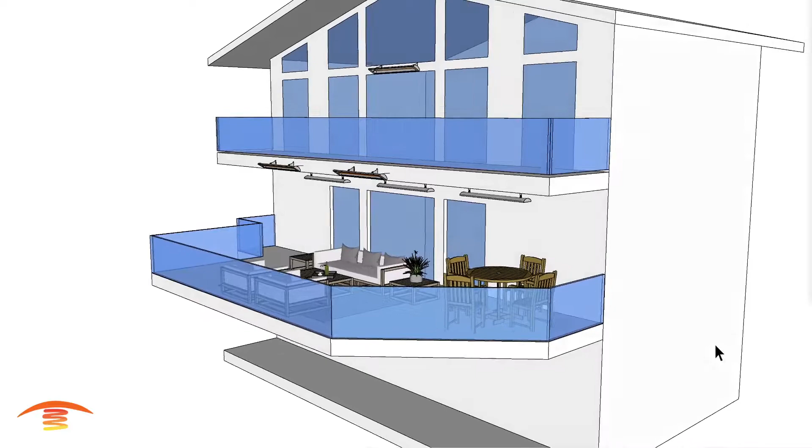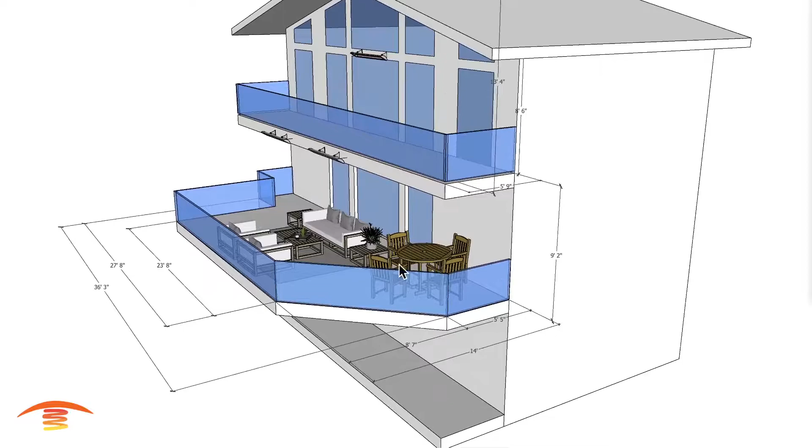Now let's get heating. Alright, so here we have this residential application. I'm just going to go right into the overall dimensions. So basically I've got 14 feet by 36.3 from this edge to this outer edge over here. We do have a section here about 23.8, and then dining space here. There might be just a two-top table here, or two seating table, but that's about 5'5". And then I have this section over here that is 5'9" that comes out.

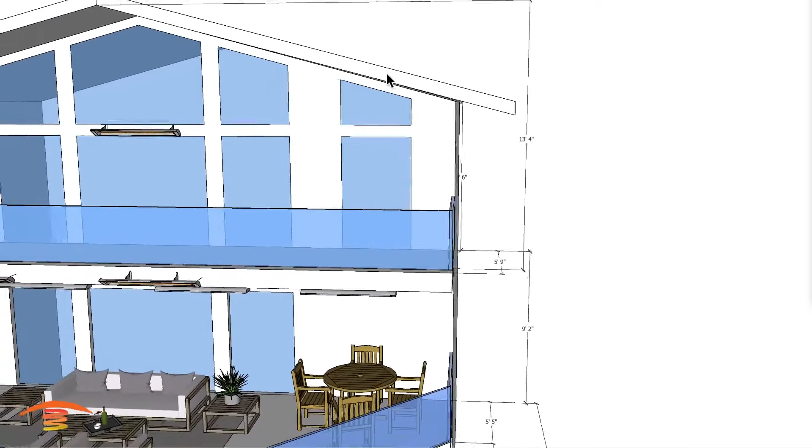And I have the overhang just 12 inches shorter than that. And you can see here I have that overhang starting roughly around that 8'6", right around here. And then all the way up to 13.4 from the tip here to the deck finished floor here. Let's see if there's anything else that we should talk about.

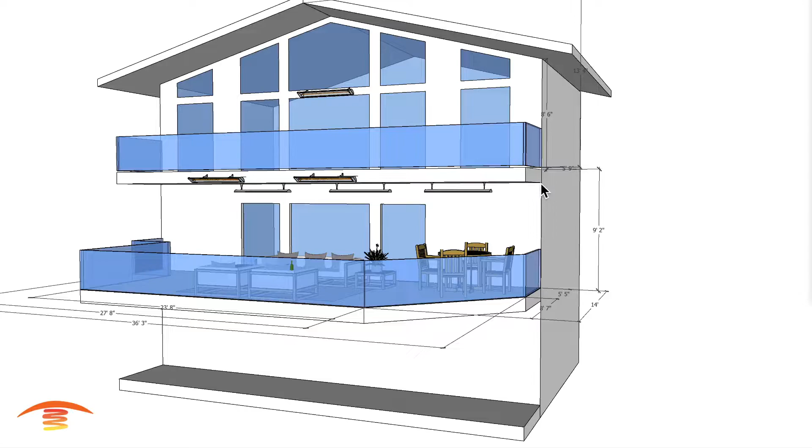You can see that there's a section that's at a 45-degree angle here, and I think that's about it. Alright, so let's go ahead and turn that 9'2" on the bottom section here to the top of the deck again. And I have this at 12 inches here, so that would actually be 8'2" to the bottom. Alright, let's go ahead and turn off that dimension.

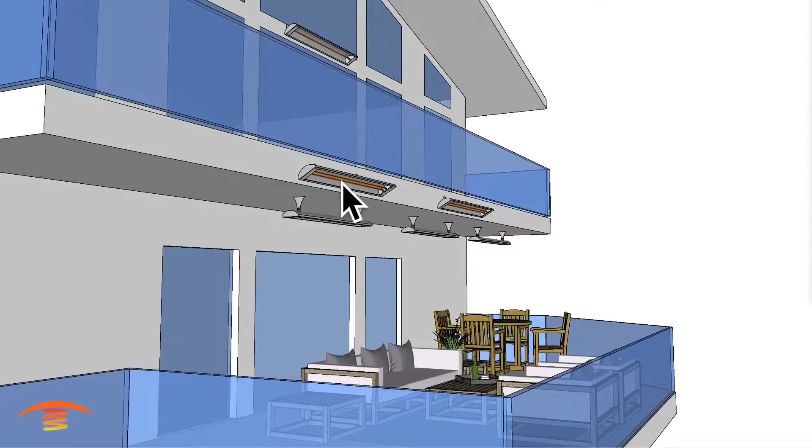Now you can see that I have a few units, and they might look like they're out of place maybe, but we can also adjust that. Essentially what I have is the CD 6024, 6000 watt 240 volt units here, and I do have them mounted centered on this 12-inch decking up here.

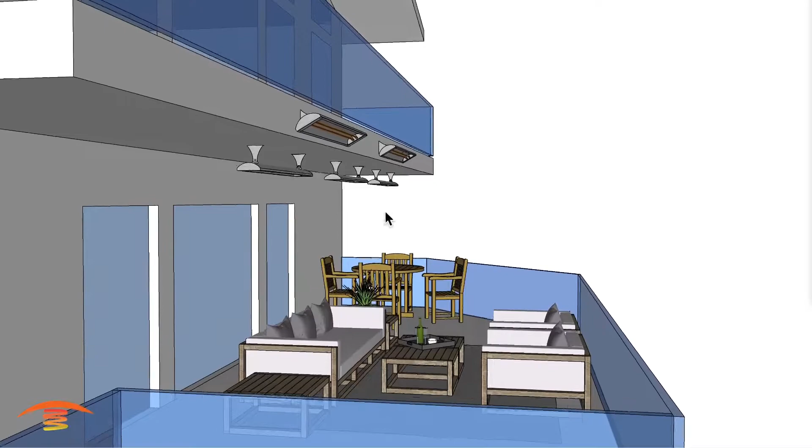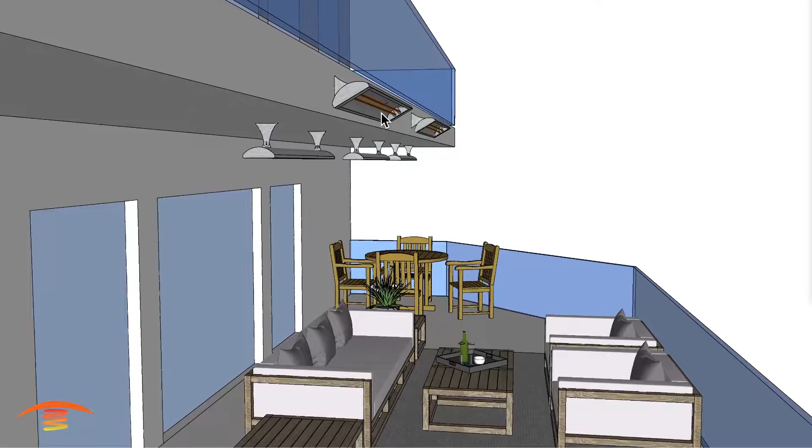And the reason I have 6000 watt units is because I need to cast that ray out as far as possible. If I place the 4000 watt units, which I have over here, in the same location, I'm really not going to cover this area here well at all. So it'd be really ineffective to place a 4000 watt heater here and then try to cover out in this space here. That's why I have the 6000 watt CD models here.

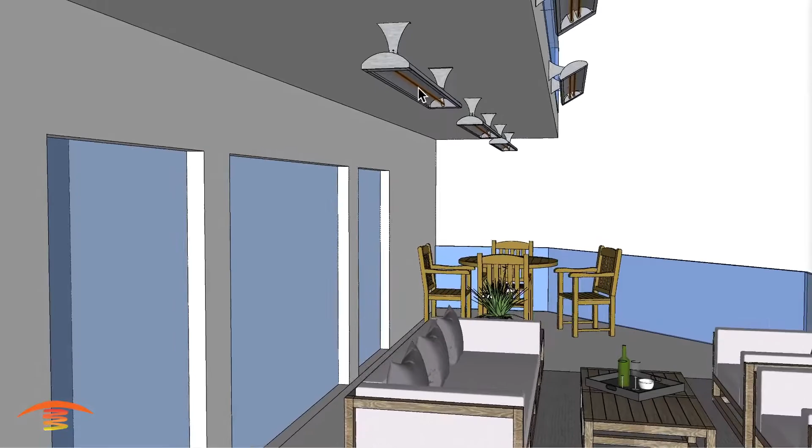These are dual element units. You can put a controller on it or a duplex switch on it. In any case, if you put a duplex switch on, 3000 watt units aren't going to be very hot, so I'd still probably just go with a control system if I could.

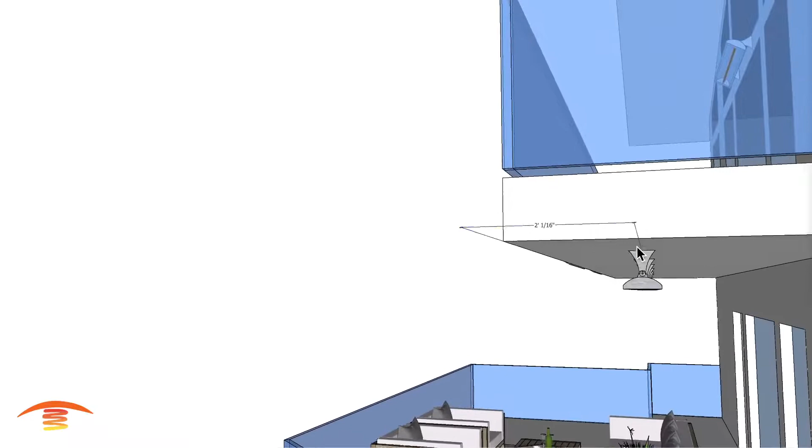Now the 4000 watt units I have placed here, and I think I have them just at about - let me go ahead and measure this off here. So from this edge here to this edge here, we have, let's see if I can get it out here, 2 feet, and this is centered 2 feet to the outside edge over here. And let me turn that off.

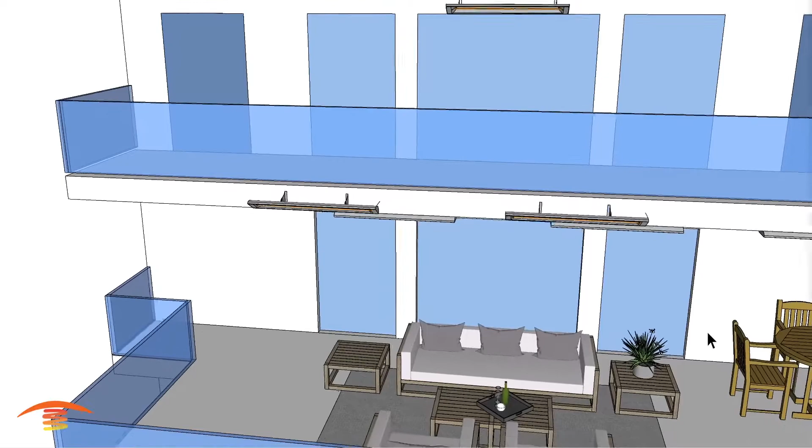And then I have them at 6 inches of clearance. Now, one thing I need to be concerned about is these are doors here. I think this is a window in the center. It looks like they're sliding left and right, or they might actually swing open.

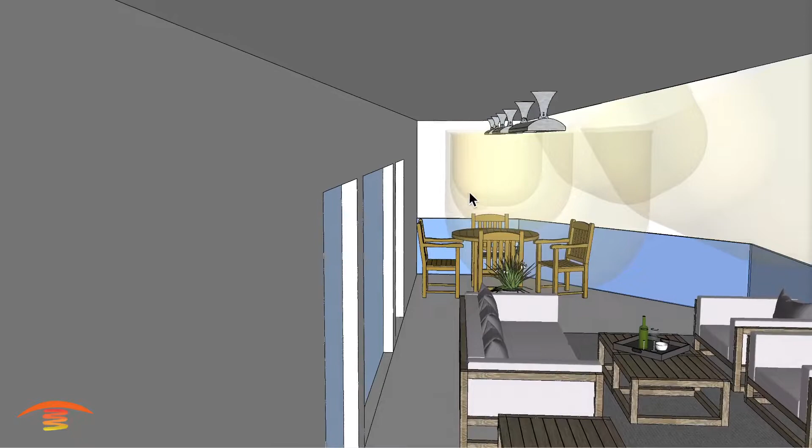If they swing open, they can only swing indoors. They can't swing outdoors with the placement of these heaters here, because I need to have that clearance below the heater, and I need that 18 inches from here to here. So if that door swings out, then I will be in that clearance issue.

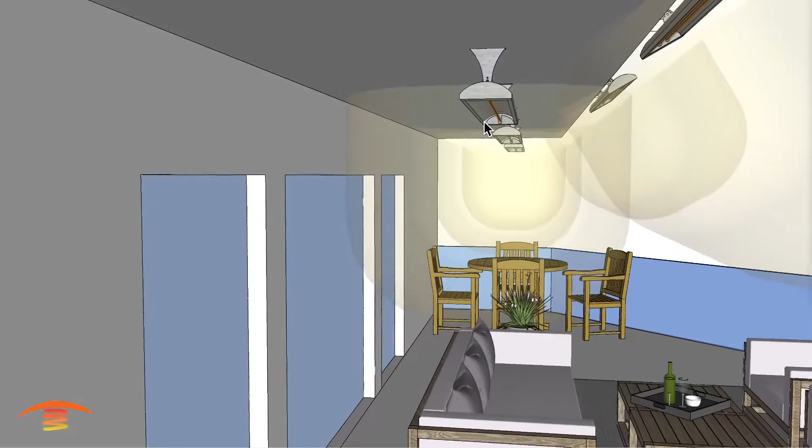If it's a combustible door, then that would present a larger issue. If it's non-combustible but it's still glass, then I don't want to overheat the glass unevenly, so that's the second issue that I would be looking at.

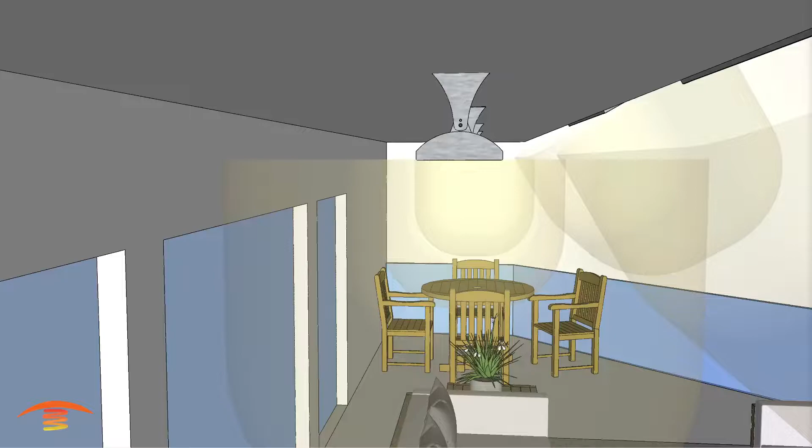Also, I want to state that these are 4000 watt units. They are the C model, so this is a C4024. You can replace this with a, say, a Slimline. So a Slimline is going to just look much more different. Let's see if I can just give you an example here without taking up too much time.

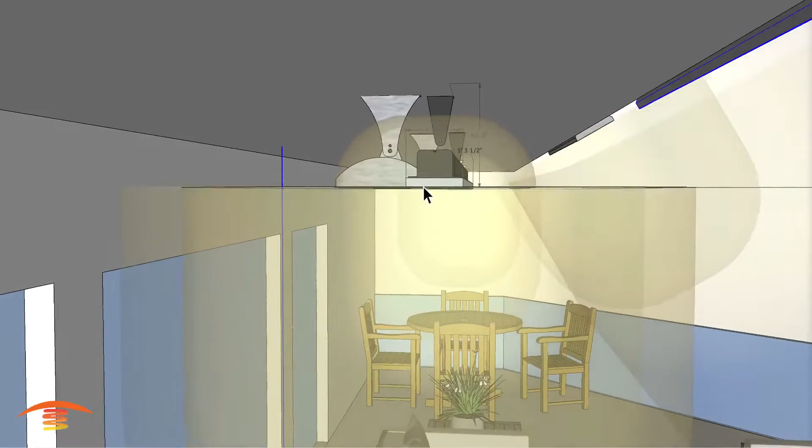Let's just place the unit here, and we're going to go ahead and change this angle here just slightly real quickly, hold on one second. We'll go like that. So you can see this, the profile is really what I want you to see. The profile is much more different.

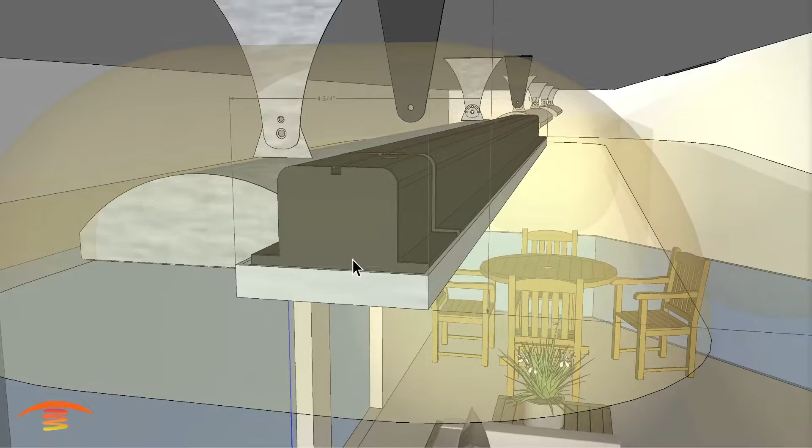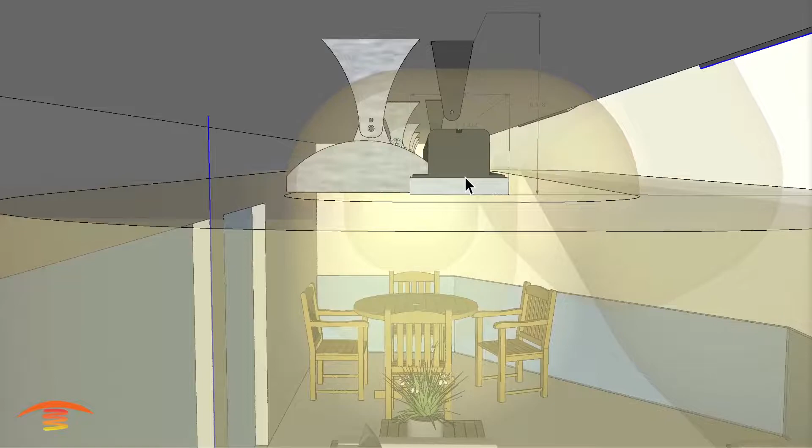Now the issue that I have with this is this property appears to be in a beach area, and if it's like maybe on an island or something of that nature, then this is made out of extruded aluminum. This body itself, the bottom here is stainless steel or powder coat finished black, but the body is, like I said, extruded aluminum, and aluminum has a corrosive issue with regards to being close to the ocean. So that is why I'm picking the C model as opposed to the Slimline.

Let me just move this over just a little bit more here, so you can get a better profile of the two.

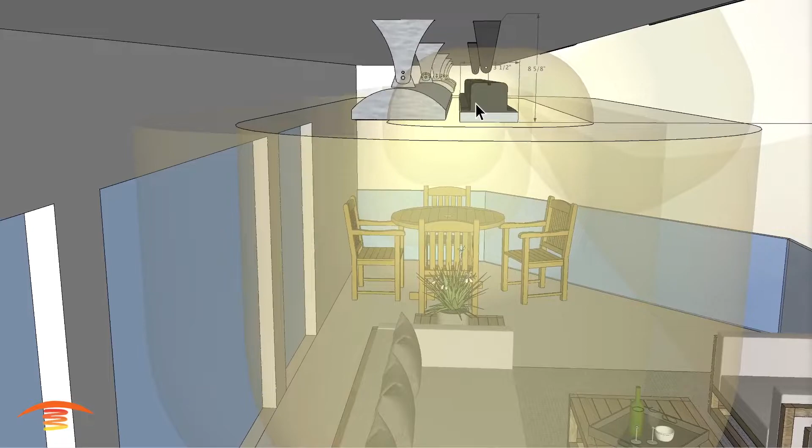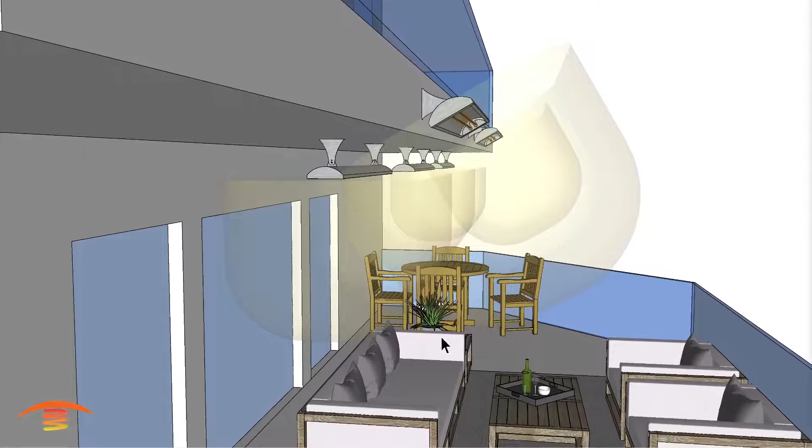So again, there's the profiles. I like the look of this better. I think it would look better, but if you put this in a corrosive environment, you will end up probably replacing it every 5 to 7 years, something of that nature. So just bear that in mind. I'm going to go ahead and delete that for right now.

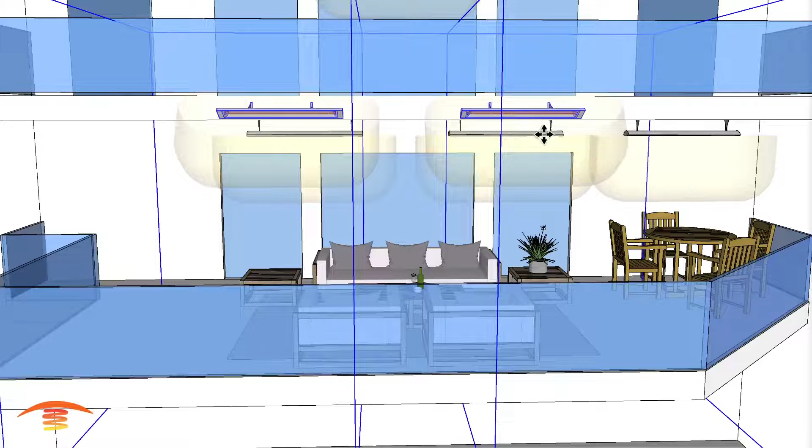Also, I should mention, these are at 30 degrees. So if I pointed the heater straight to the ground, lifted it up 30 degrees, that is the placement of this heater. These are pointed straight down to the ground. I also want to state that these two units are centered within this overall space. That's how those look. And then these two are centered with a 10-foot center from here to here, and they are centered within this span of the patio.

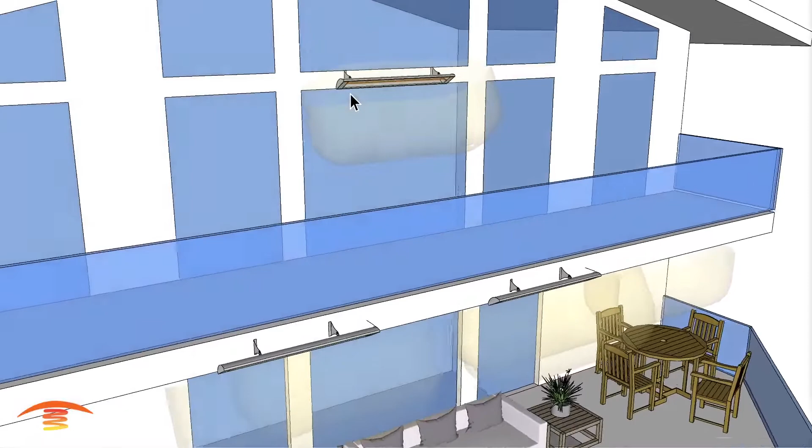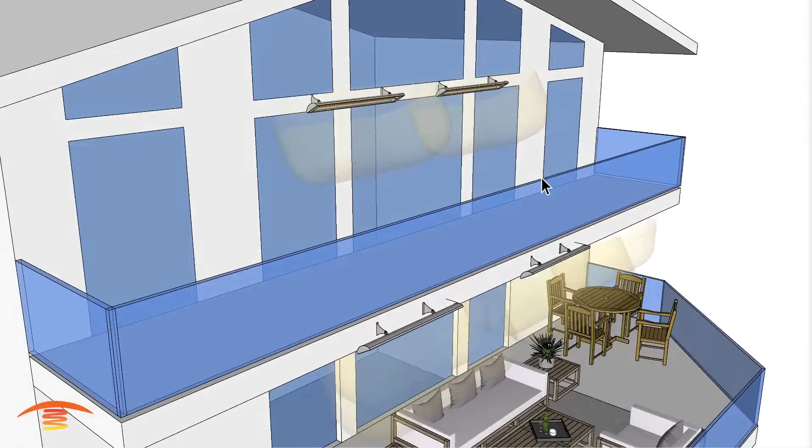Now, I would probably want to go ahead and move those so that they are more centrally placed, like these two, something like that. But I would rather show you what the footprint of heat is right now being centered in this space, because I'm not quite sure if this is the actual setup for this space. I think they're going to probably want to use this space more completely up here, so that's kind of why I have them placed this way.

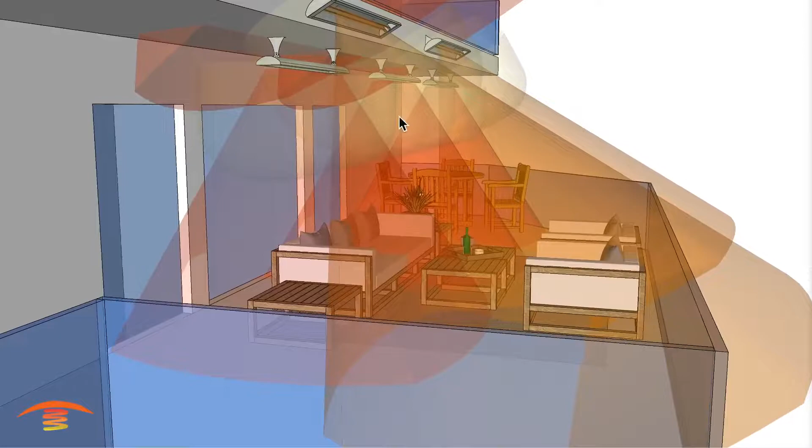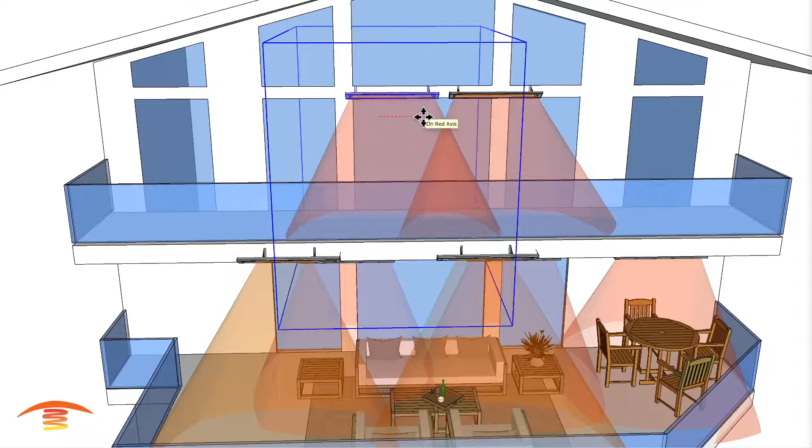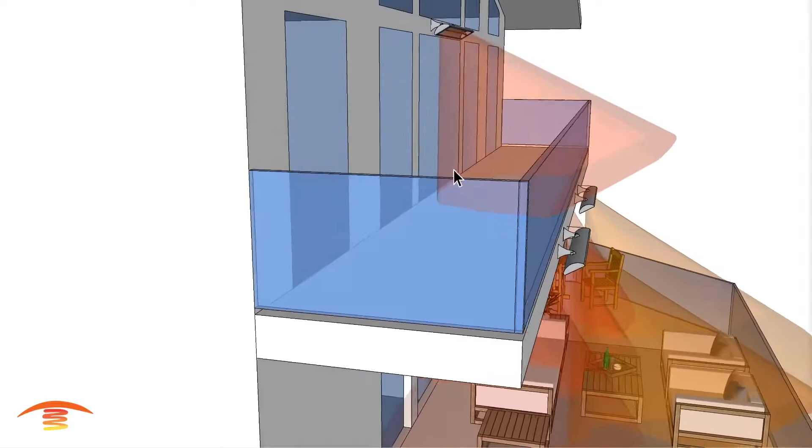And this one here is just at about center from here to here, and that should give you a good dining space over here. This unit, which is a 4,000 watt unit as well, and because I'm not casting out so far like I am over here, I think this would be efficient for this application, this space. But you also may want to double up by maybe placing a unit something like 8 feet apart. So we'll go 48 this way, and then maybe moving one 48 this way, and then you can see that would be another option for heating up more of the space up here.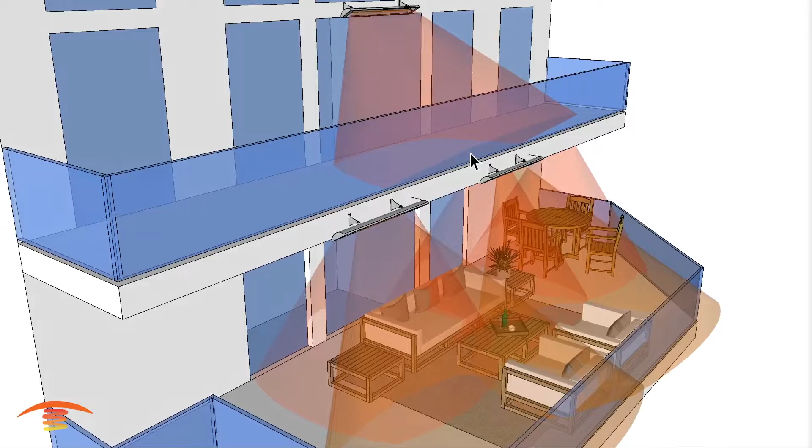These are also doorways, so that is another consideration we need to keep in mind. We can't have a door swing out underneath the heater itself, because if you left it open, that would create a hazard, possibly cracking the glass, or if it's a wooden frame or something like that, it would be a fire hazard. So just bear that in mind.

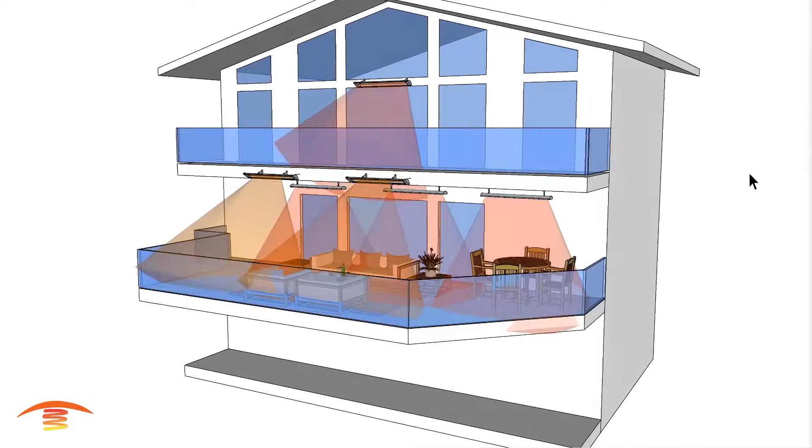All right, so let's go ahead and look at the footprint of heat. We're going to concentrate down here first. You can see with the two 6,000 watt units, and I'm going to turn off the clearance for the units itself, I'm getting a good throw out here into this space, and we're getting good coverage from left to right, and that's why I centered it within this span. Inside, you can see that we're getting a pretty good coverage.

4,000 watt units pointed straight to the ground, that's an ideal height for this model. Again, you could use the Slimline, but you can see here that we are getting very good coverage from here to here, as well as the small dining table over here. And then above, you can see we're getting good coverage throughout this portion of this patio.

So again, if you wanted to only use one unit, we'll go ahead and put that back at centered and delete that out, and you can see that you'd only get about the coverage of this doorway here. So it's about 9.5, 10 feet from here to here that you would feel that warmth.

This is infrared light waves. Infrared light waves are not visible to the human eye, so you won't see this orange glow. However, if you're not within the ray of the infrared light wave, you will not feel the warmth of the outdoor heater itself, so you want to bear that in mind. You need to be in that ray to actually feel the warmth, and you want to be in the ideal amount of heat in order to feel that comfort that it puts out.